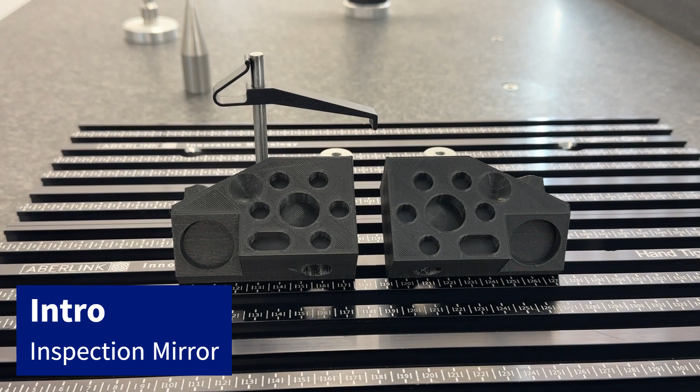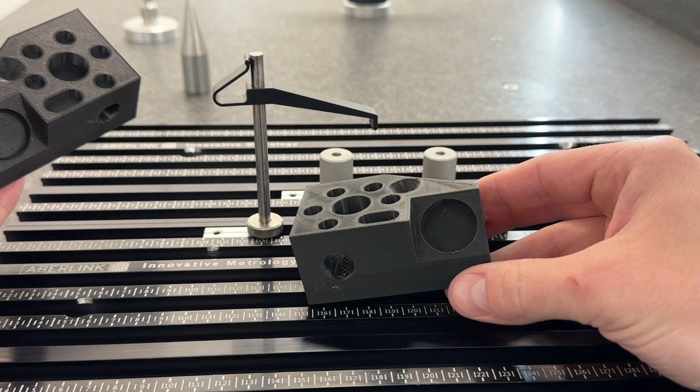So this is Inspection Mirror, and the examples I have for the machine are the large 3D printed test blocks. I have a left hand and a right hand. We're going to do a program now for the left hand, and then I'll show you how to use the Inspection Mirror to create a program automatically for the right hand.

So this is the inspection I have created for the left hand block. It has multiple head indexes. It has a range of different positions as well as datum callouts. And the idea now is I'll show you it running through just so you can see it. I will speed the program up, and then we're going to use Inspection Mirror to copy over and create the

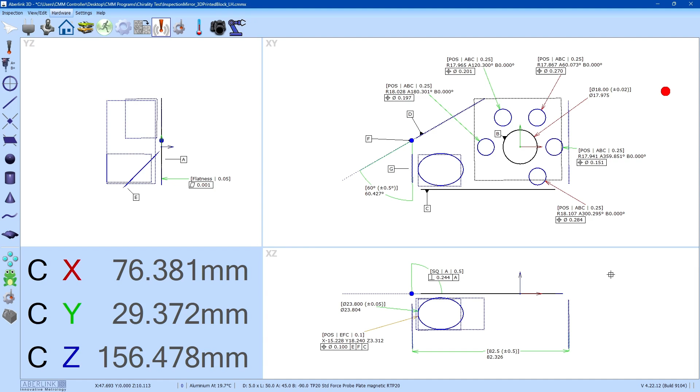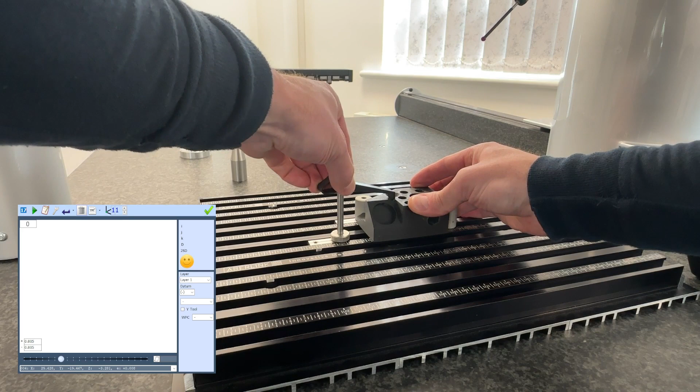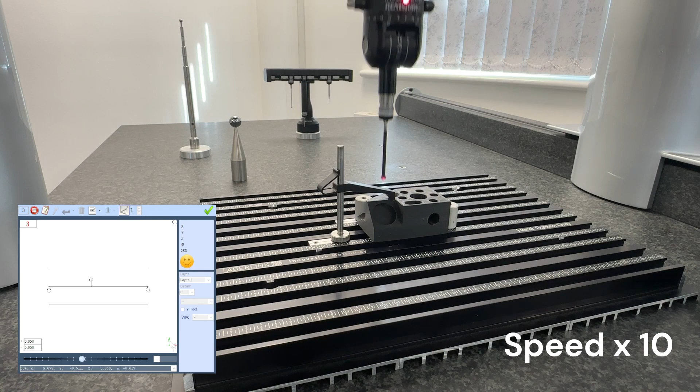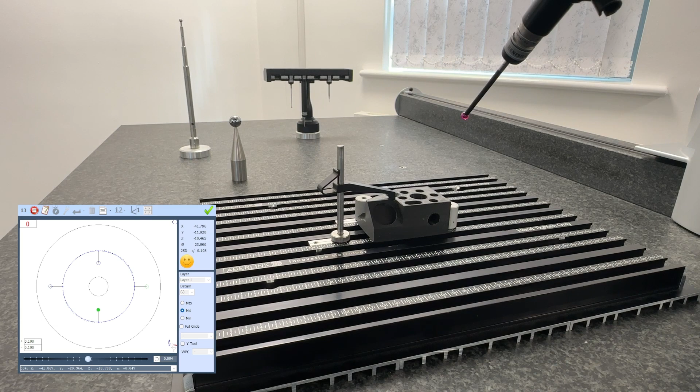right hand inspection routine. So let's load the left hand part, fit the clamp, and then we'll run the inspection. And that is now complete. And if we switch on the software, you'll see that inspection is now complete, and we are ready to now mirror the program using Inspection Mirror.

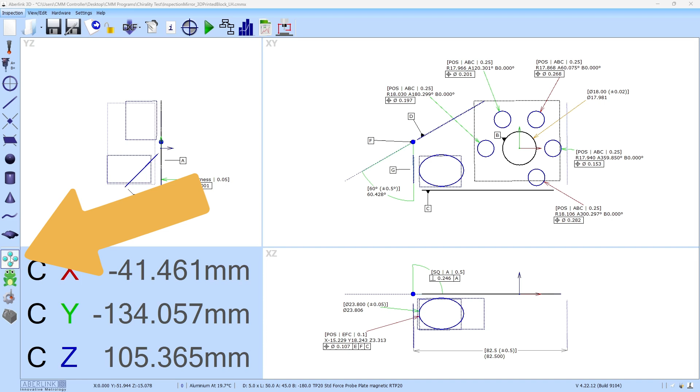So once the program is complete, we are ready to then mirror, and this is done using Feature Array. So if we click on the Feature Array icon, you'll see we still now have the same options as before. So ring, grid, and mirror. Only there's a new icon now in the top left hand corner of the Feature Array window. Hover over it, it says Mirror Inspection.

If we click this icon, you'll see the software generates a message, Mirror Current Inspection. The inspection will be mirrored about the component YZ plane through the origin. It is recommended to save the current inspection before mirroring. Mirroring is imperfect. You should check over the result and fix any errors. Do you wish to continue?

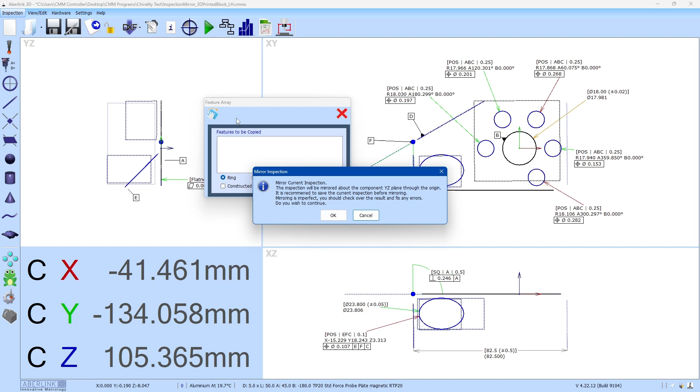If we press OK, you'll see the software has automatically flipped over the inspection, but it has maintained its datums, and it's also mapped over any probe angles ready to run. So we'll now adjust the fixturing so that the fixturing is also mirrored, and then we'll run this through.

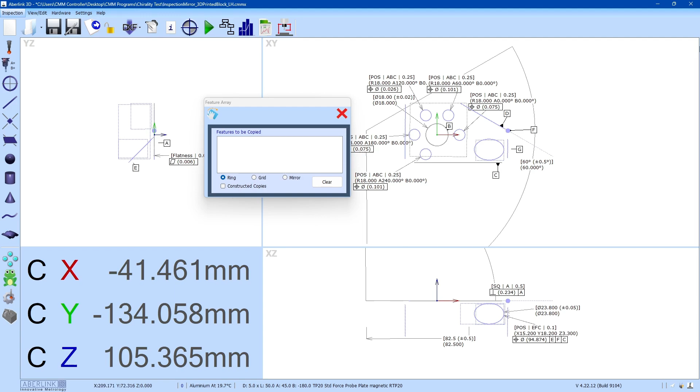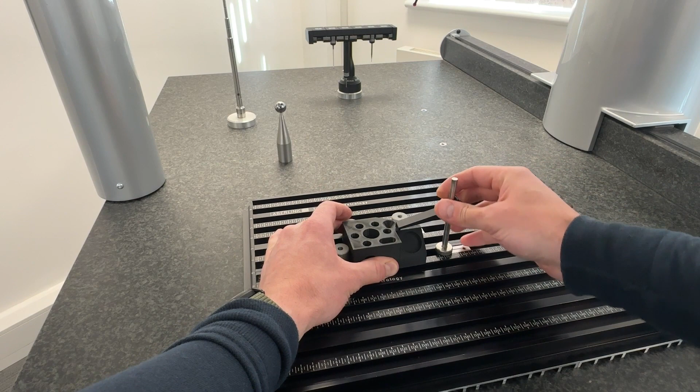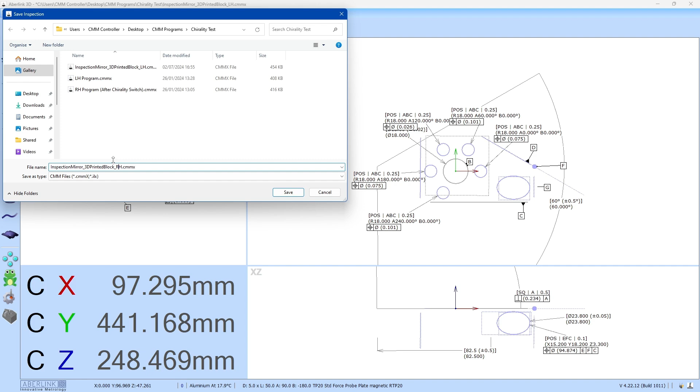So there's a few quick steps I would recommend doing before running this. The first one is obviously to click Save As and save it as a separate program. So in this example, I'll call it RH, right hand. That just differentiates the two programs so you don't overwrite the old program.

The next thing, because we used multiple indexes, if those indexes aren't already built into Probe Manager, you'll notice the software automatically adds those offsets. So in the previous program, I used B135 and B30, and the software has automatically added -135 and -30 for this right-hand program. So you'll need to datum those. I'll not do that in this video just to save a bit of time, but datum those.

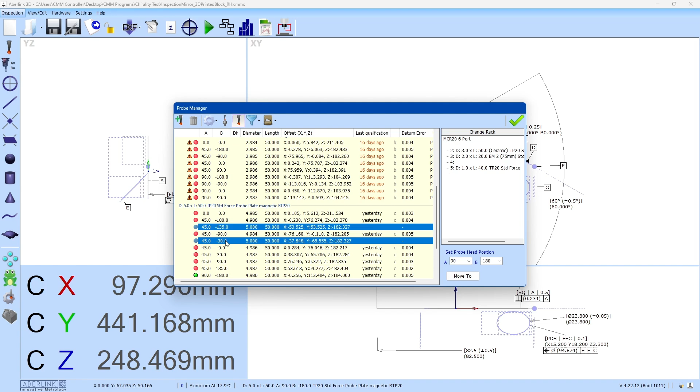And then the next thing would just be to go into program details and tick manually measure reference features and auto remeasure reference features. That will teach the reference system, and then this will run through as normal. So I'll just datum those probes now, and then we can run the program through.

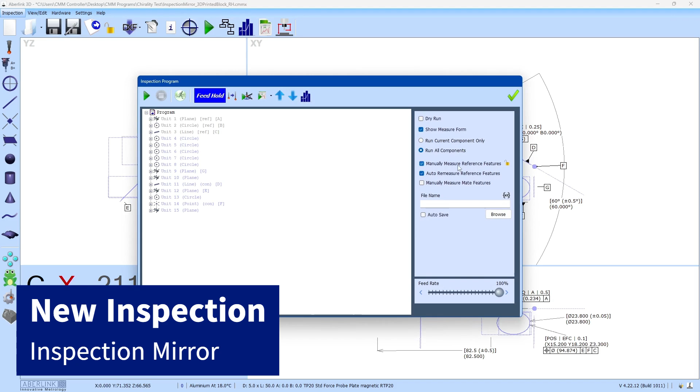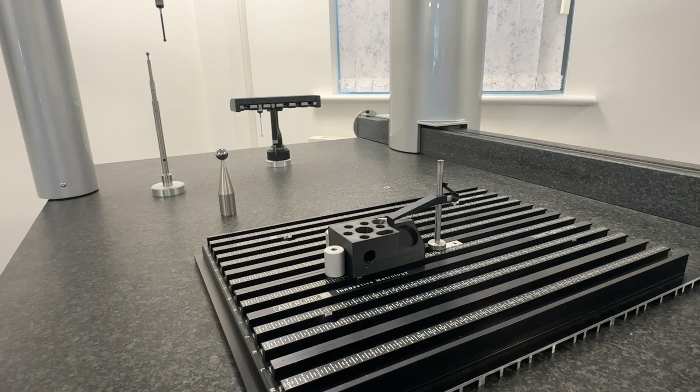So the probes are datumed. I have manually measure reference features and auto remeasure reference features ticked. So if I press play, I'm now ready to run through the program. I'm just going to teach the reference system manually with the joystick. So it now knows where it is. I'm just going to move the probe up and out of the way. You can watch this now cycle through.

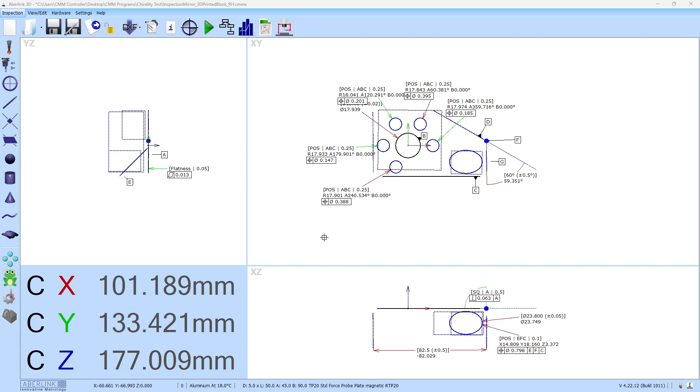And there we go. So that is the right hand program complete. You'll see it added all the indexes in, added the probes that we require, which we can then datum, and all of the positional callouts have also been mapped over, as well as maintaining all the datums. So it's a much more improved version of the mirror that was brought out earlier this year. This is for mirroring the entire inspection rather than just individual features, and as you can see, it works great and saves a bunch of time.